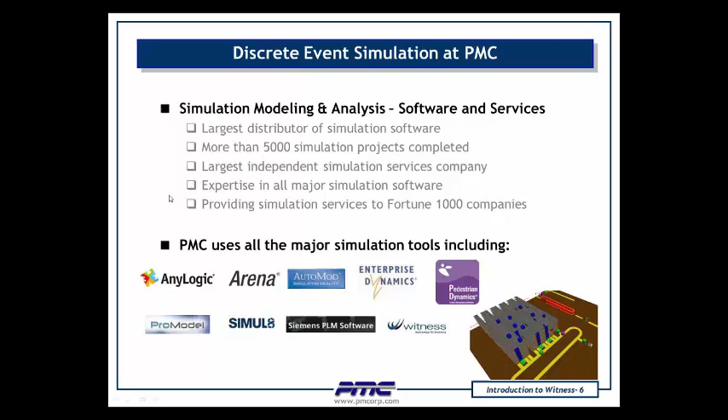Simulation is one of many of the very powerful tools of industrial engineering for improvement that we use here. And this is what it does: you build a model on the computer of a real system, manufacturing, or it could be healthcare delivery or warehousing. Simulation has very broad applicability.

You conduct experiments with the model and evaluate what might be done to improve the system. It might be a system that already exists and needs improvement or expansion, or it might be a system that's under design. And since simulation can do these things, particularly including the handling of random variation, it's a wonderful way to assess potential improvements in the real system without having to disturb or shut it down or disrupt it. You're doing your investigation on the computer.

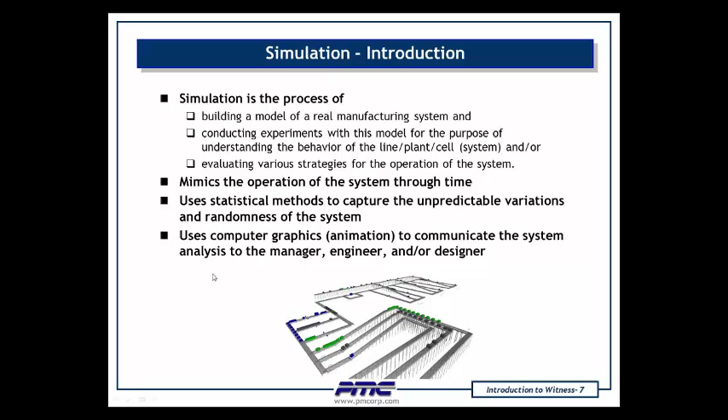And simulation software nowadays lets you build an animation almost automatically. The incremental effort is nearly zero. That makes the results easier to visualize, understand, and communicate. So these are some very good reasons to simulate.

You can test before implementation. For example, designing a new factory. Would you rather discover that you need to add another machine or knock out a wall and change things around on the computer or in concrete on the factory floor? Well, if you test before implementing, it's a lot quicker, a lot cheaper, and a lot less disruptive.

And particularly for manufacturing operations and for service industries also, simulation is a very good way to investigate with all the power that statistical analysis provides of doing all these different things to reduce costs. And many of these approaches to reducing costs are synergistic, where two or three improvements suggested by a simulation analysis are far more powerful than any one of them taken individually.

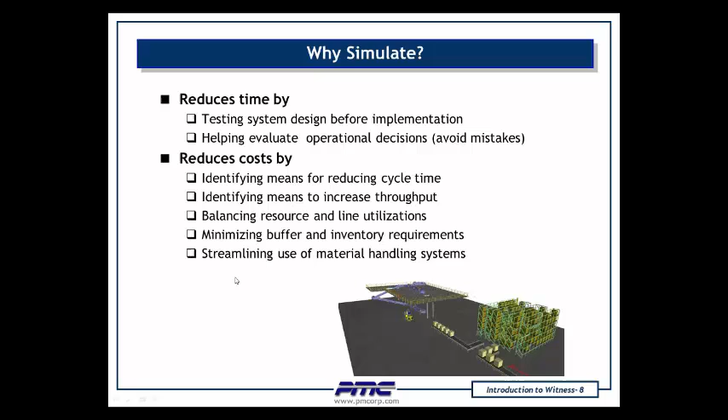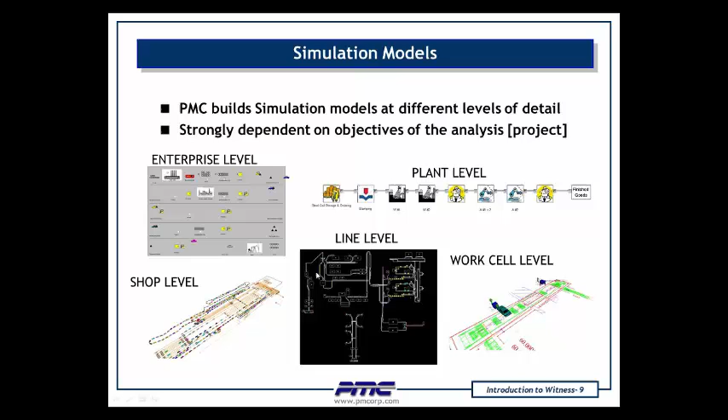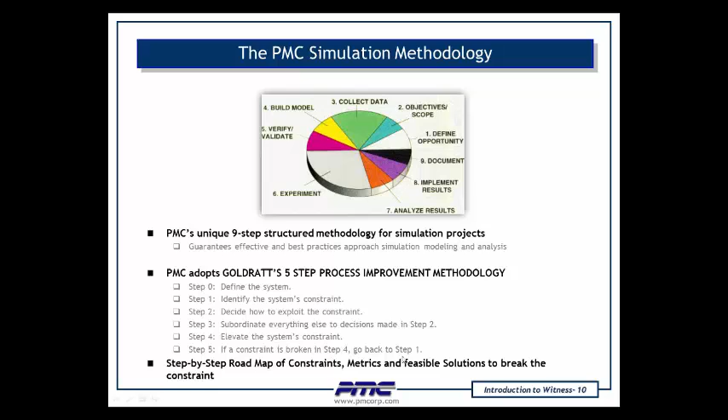And these ideas fit in very well with the famous Goldratt 5-step process. Simulation follows these ideas. Now, coming in for a bit more detail about Witness.

Witness is one of many software simulation tools that we use here at PMC. Here at PMC, we use 8 or 10 of them. I'm well acquainted, expert modeler in 5 of them, Witness being one of them.

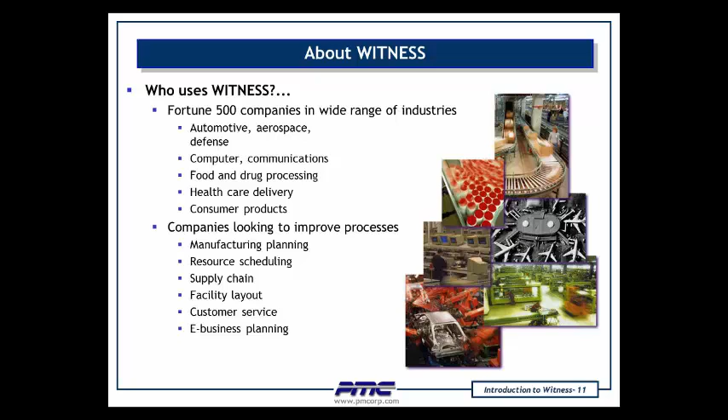And here's some appeals. This first list shows the versatility of simulation: manufacturing, heavy manufacturing, computer manufacturing, healthcare delivery, and there's a wide variety likewise of companies. And Witness is particularly useful many times in both manufacturing and warehousing, and not just one or the other, but the whole supply chain from manufacturing to warehouse to distribution.

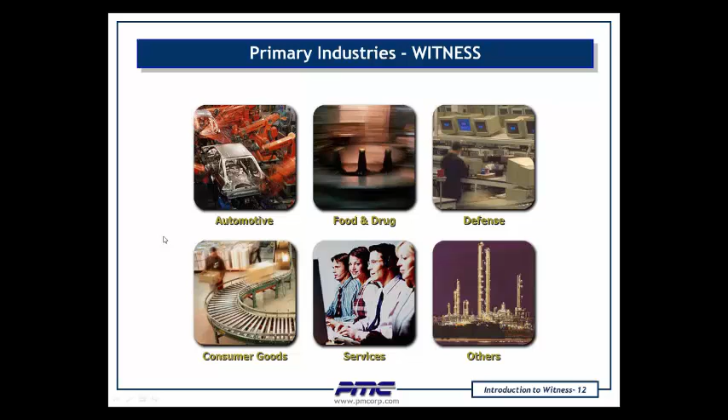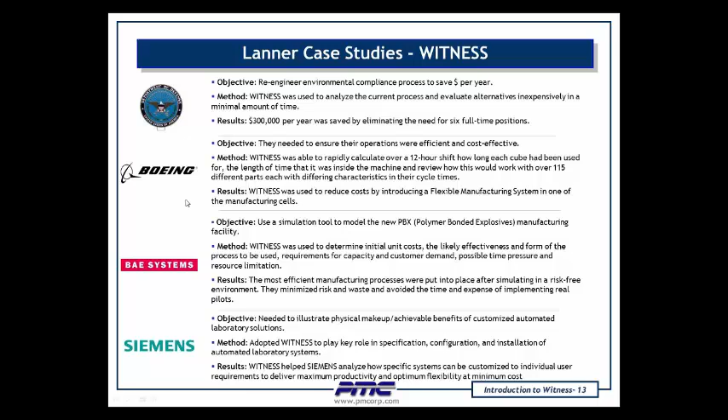So these are case studies. Lanner is the Witness software provider, and we're in partnership with them. And here are some of our own case studies likewise that we've done here at PMC. And the details on this slide likewise give you an enticing preview of how helpful simulation can be.

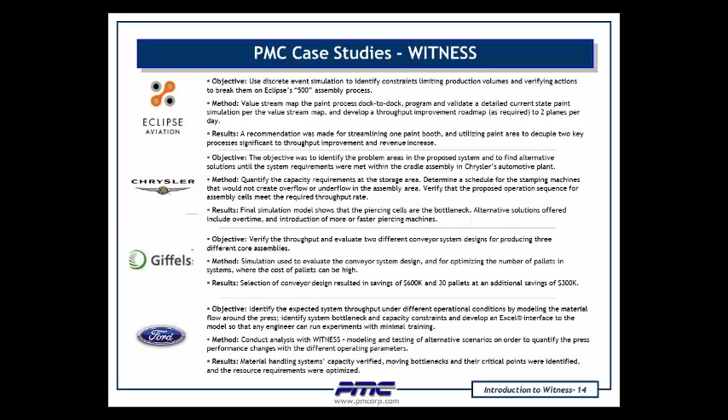And simulation is especially helpful when it's used not in isolation, but in concert with the other methods of industrial engineering that we listed previously, like Six Sigma, 5S, value stream mapping, and so forth. So simulation improvements gained using Witness have a good long ancestry and pedigree.

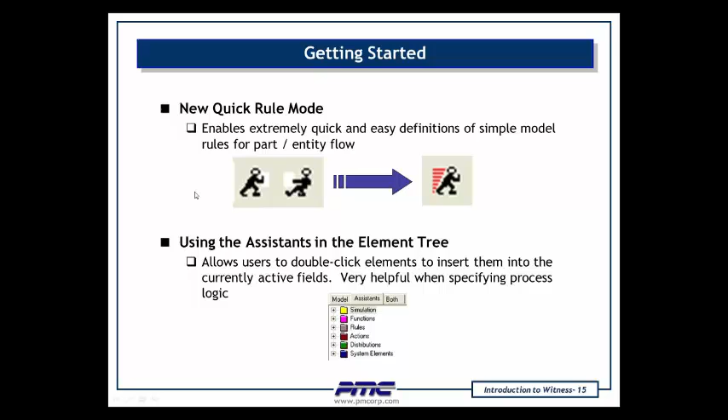Now, conceptually, to think of how would you get started using Witness and understanding what goes on inside a Witness model, there's these little tidbits. For example, that's push and that's pull. Witness is very good at both, pull systems, push systems, and this gets right into how does Witness work.

Well, in the Witness world concept, to build a simulation model, parts move through a system. The parts might be parts in a factory, cases in a warehouse, airplanes in an airport, patients in a hospital emergency department, guests checking into a hotel, packages coming in and out of a distribution center. There again, you see the versatility of process simulation.

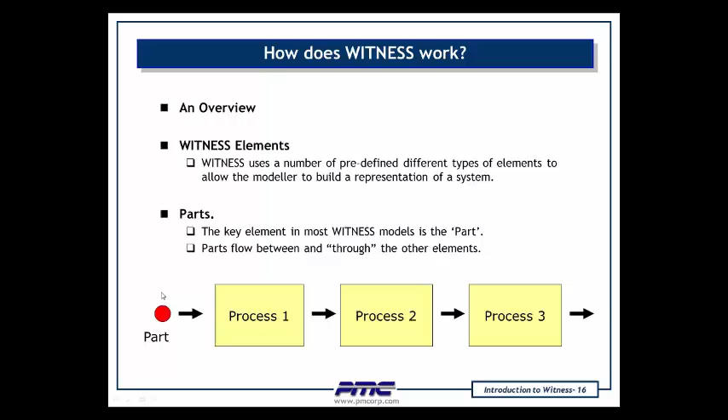So Witness moves parts through what Witness calls machines. Machines are things that add value. In a factory or a warehouse, they would be what you typically call machines. In a hospital emergency department, the machine might be the X-ray machine or a laboratory testing machine like the MRI.

Buffers are where parts, like patients in a waiting room, or parts in a factory sitting in a buffer, as Witness calls it, queue up, as the British would say. Witness has a United Kingdom pedigree. These are some of the names of places where things can queue up, awaiting attention.

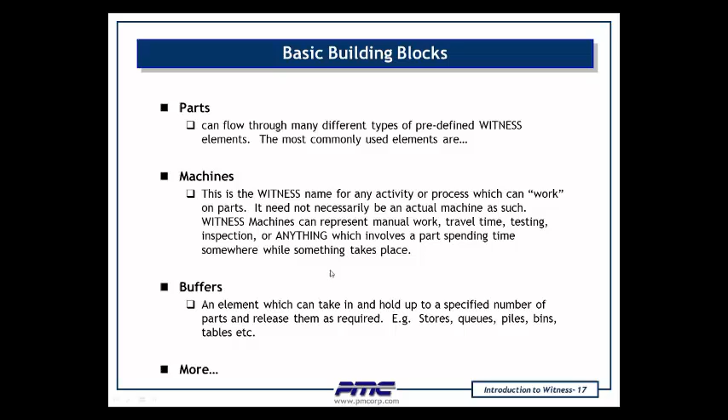Witness implements conveyors, which would typically be used in factories and warehouses.

Witness also has a concept called labor, which usually, especially in a factory, you would think of as the operator of a machine or the mechanic who comes to repair a machine when it malfunctions. Typically, labor is put in the model separately. It can be given a schedule of work, and machines request labor, and one machine may have higher priority than another for requesting the labor, and so forth.

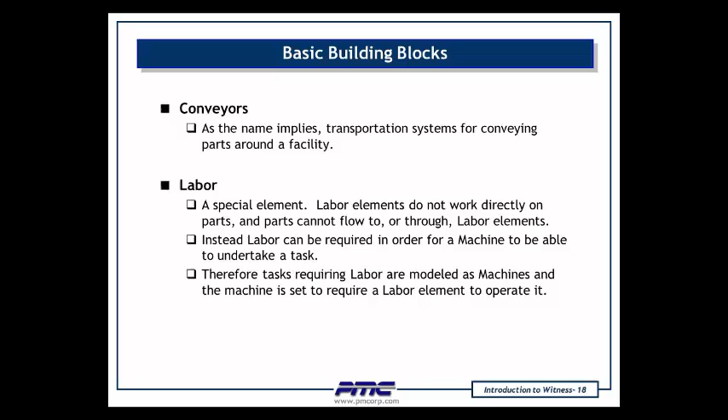A machine is perhaps the single most powerful and vital concept within a Witness model after you bring the parts in and out. At a machine, Witness allows great power for specifying how the machine gets its input and at what rate, and does the machine need labor to do its work, or is it entirely automatic? How long does the work take? That shows a fixed number, but that can be variable. Where does the machine send its output? In what quantity and where to?

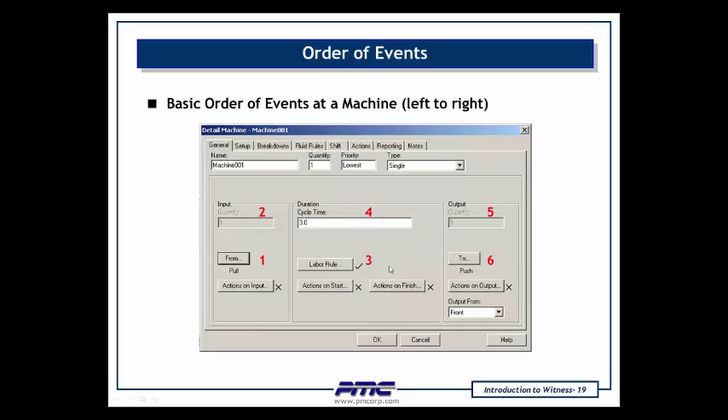These rules, well, you heard me mention the pull and the push, or the machine can be passive. The third common rule here is wait, and something else is taking the initiative.

Also within Witness, both labor and parts can travel along paths, and parts can travel using tracks and vehicles. The vehicle, as Witness thinks of it, would likely be an AGV, automatic guided vehicle, or a tugger train, or a forklift, for example. And in Witness, vehicles run along tracks. So in Witness, these two concepts are inseparable. They always work together. Power and free systems have a separate modeling construct.

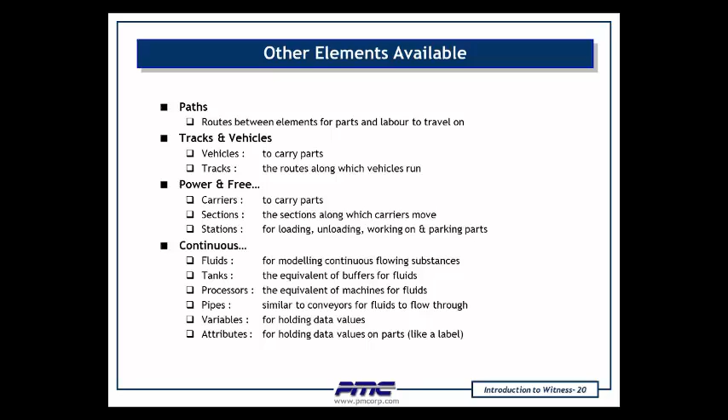If someone branches out to continuous simulation, that might be like an oil refinery or a chemical plant, these constructs are available. Wait, pull, and push are the fundamental input-output rules. Witness has a rich vocabulary of more elaborate rules to represent more complex process logic. So there's a great deal of power represented on this slide.

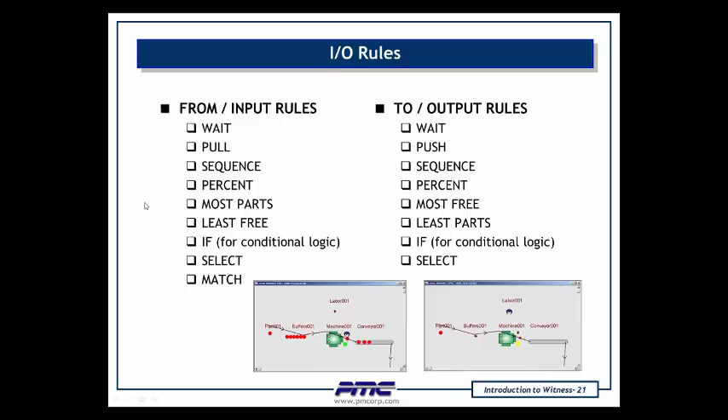The first two in each column are where a new modeler would start using Witness. And here's a little snapshot of a Witness model.

The different colors show status of parts, labor, and machines. For example, a machine can be busy, idle, off shift, or down. In other words, it's under repair. Or it can be starved - it's ready to work and no work is reaching it. And Witness, like other high-power simulation software, automatically provides, at no extra request, all these valuable end-of-run statistics.

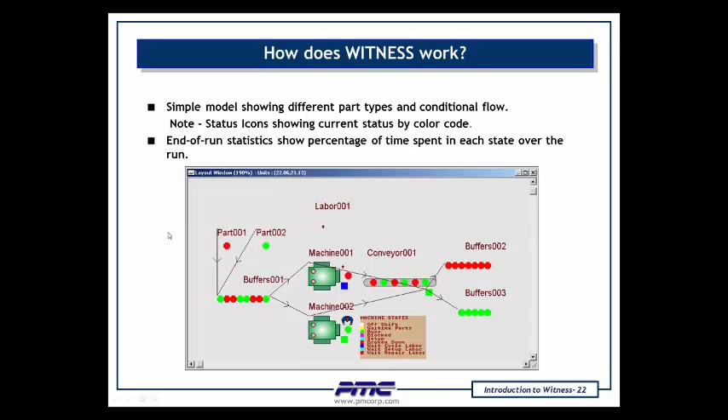So the Witness software is well regarded worldwide. It can do either discrete event, which is primarily what we're talking about here, or it can do continuous, like the oil refinery. Quick, easy model building. It can be integrated with spreadsheets and databases. The animation is very valuable for visualization and understanding, and for communicating results to management. The statistics are reported automatically and can be exported to spreadsheets or statistical analysis packages for a deeper look.

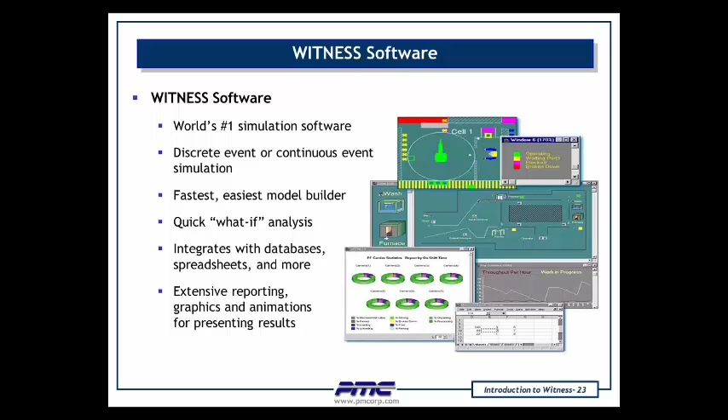Witness now has, this is relatively new and an improvement, an experimenter that allows the modeler to create a variety of scenarios, like what if we had one slow machine, or what if we had two slow machines, or only one machine but it's faster, we might pay more for the faster one. What if we had a crew of 3, 4, or 5? What if there were 2, 3, or 4 forklifts in our fleet for parts movement and material handling? Well, quickly that becomes 2 by 3 by 2 by 4. You get a lot of alternatives.

The Witness experimenter - you click one button, they all run one after the other. The results you want are gathered and compared. You get what's called a tornado chart showing what's most important. You get these line and pie charts, and you tell the experimenter to optimize based on whatever performance criterion is your criterion for optimization. The experimenter will use a variety of optimization methods that originally came out of PhD work in theoretical mathematics, and now they're inside the simulation software for you to use, and it will guide you toward the best of a great many alternatives.

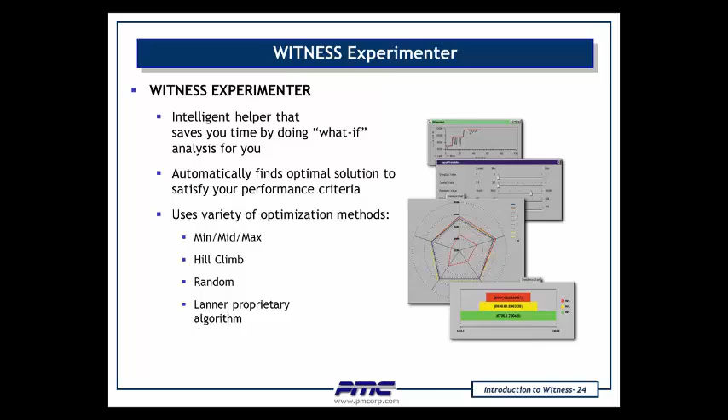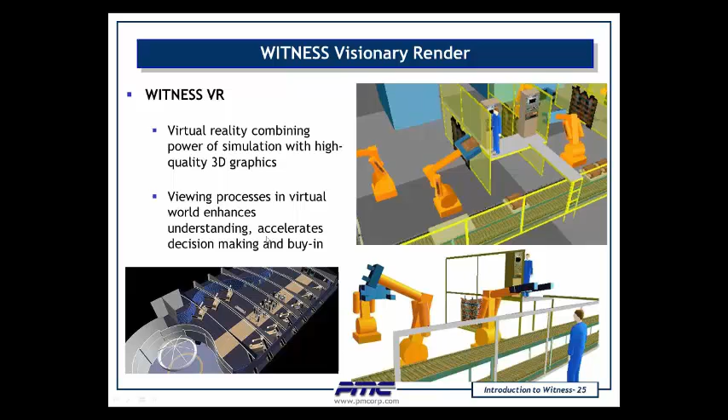And Witness has a virtual reality, they call it the visionary render. As you can see from these, you just click one button on the mouse and the animation goes back and forth between 2D and 3D animation.

And there's a runtime version. For example, some of our clients prefer that we build the model at PMC using our full-blooded version of Witness, and the client can then buy, at much less expense, a runtime version to run and examine the models that we build. And that's up to the client.

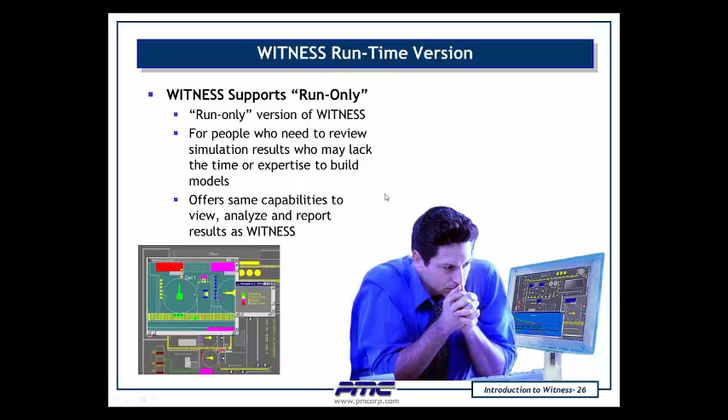Some clients want us to build the models. Other clients want us to teach them how to build the models, so that if the client has enough modeling work, we help the client become self-sufficient, and the client returns to us for occasional, particularly complex questions. So it's up to the client. And I'll turn it back over to our hostess, Claudia, now for questions and discussion.